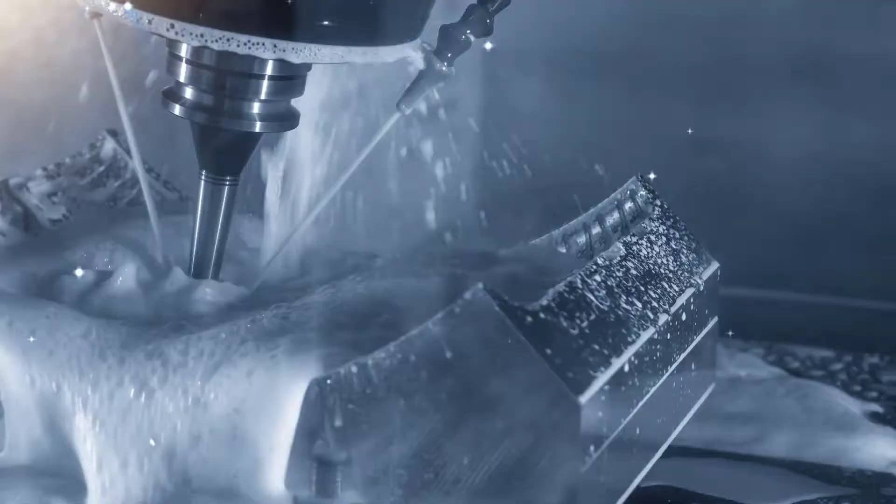Hello and welcome to this GibbsCAM Tech Tip on Transforming Toolpath.

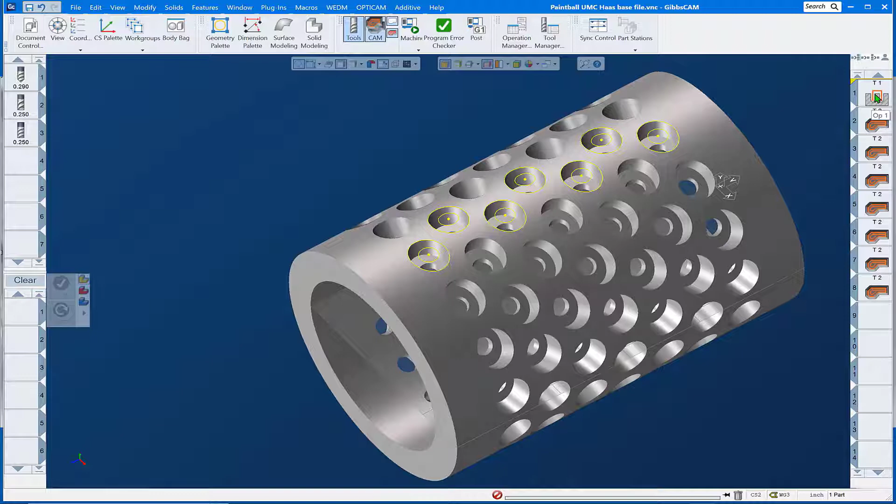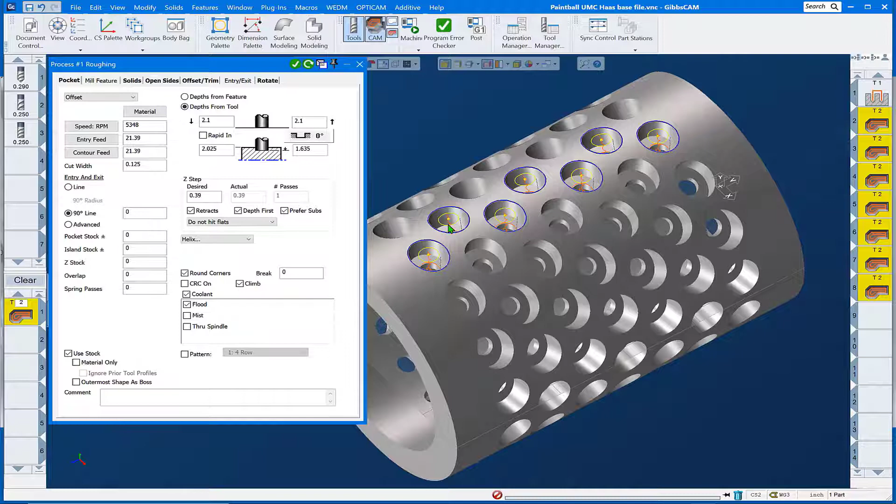We're looking at a rotary encapsulated die here that we need to do some repetitive toolpath on, and then rotate it around this part to complete the operations we need to perform. So looking at this, we have a simple drill routine running down this row of 4 and back up this row of 3. And we also have a roughing pocketing routine that's doing the same thing. Down the row of 4 and back up this row of 3. And there's actually 13 instances around the part.

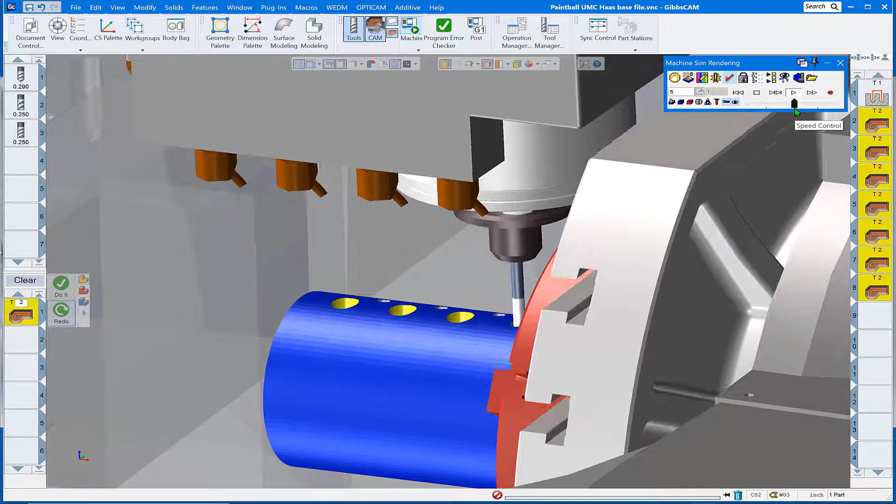So let's take a look and see what this looks like in cut part rendering. We got our Haas UMC 750 set up here. And we'll go ahead and do a render start. And we can see that it drills the 7 holes right in the manner we want. And now we're pocketing down a row, back a row, just what we need. Okay, well, let's get this populated around the whole part then.

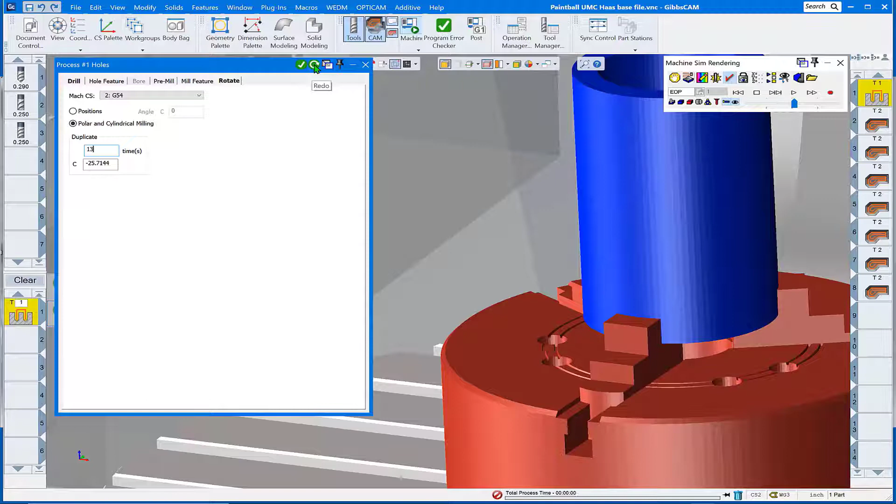First off, we'll do the drill routine. We're just going to come in here under the rotate tab, tell it we want 13 instances of that at this angular displacement, and give it the redo button. And it updates that process and operation over there on the right. And we'll do the same thing for the pocketing routine at 13 more instances at the same angular displacement. Say redo it. And the rendering updates.

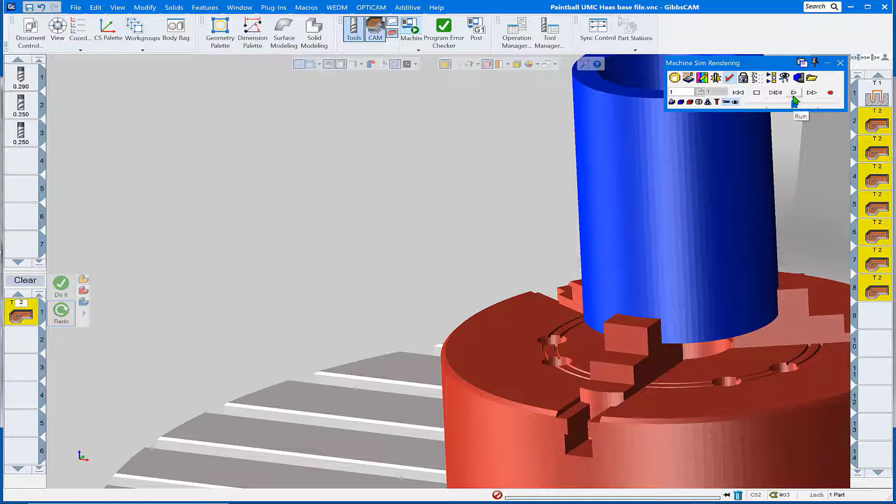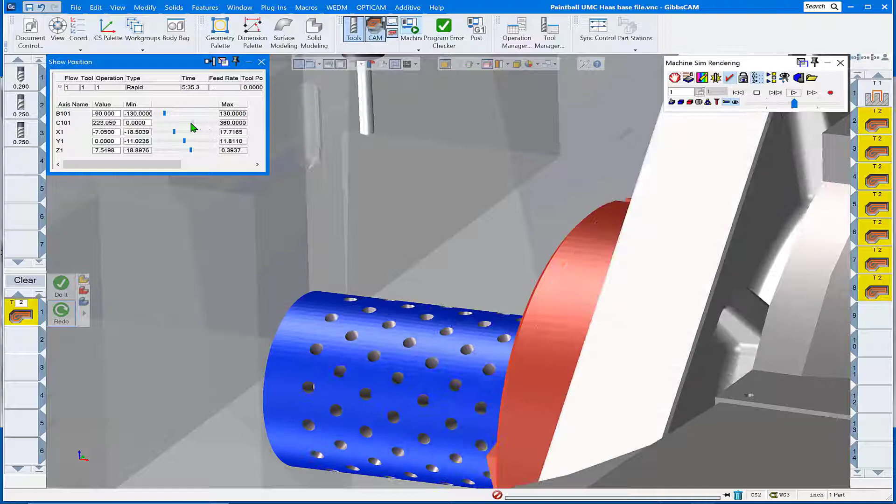And let's rerun the rendering. The play button here. And bada bang, it knocked out all the drill routines. Let's take a quick look at what we got here. We open show position, we can move the Z-axis head up out of the way and rotate the C-axis around to see what we have. And yes, we covered all the start holes we were supposed to on the die.

Let's go ahead now and run the pocket routine. Well, that is not quite what we were hoping for. What it's done is taken the operations over on the right hand side and done exactly what we asked it to and repeated it 13 times at that angular displacement around the part. That's not quite the toolpath we were hoping for. So let's undo that. Let's set this back to 0 and do a redo of that.

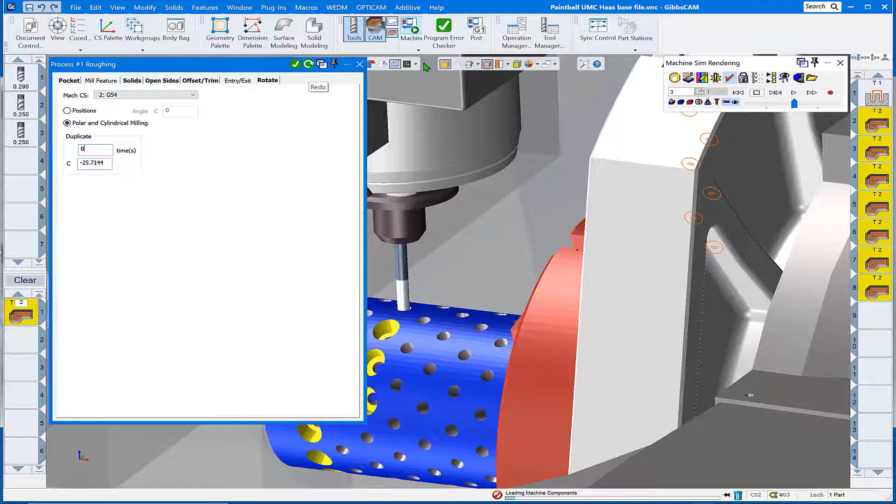It updated the rendering, and before we start the rendering, what we want to do is transform the toolpath. Tip of the day. We have these operations all highlighted, and we're going to transform that toolpath into Plug-ins, Toolpath, Transform Toolpath. The Transform Ops dialog comes up. We have the ability to translate either in HVD or in a rotary fashion, which we're going to do today, around an HV center at our angular displacement we wanted.

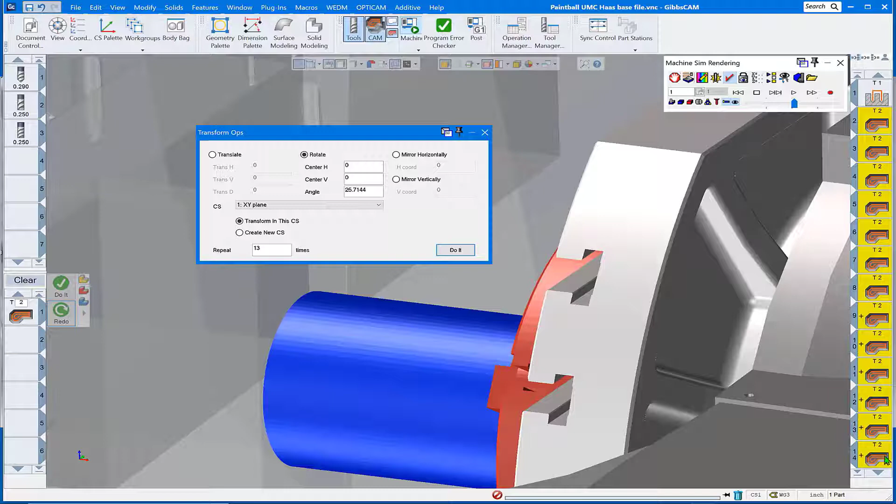From the XY plane, we're going to transform in this CS 13 times. We'll do the do it button. And sure enough, we had our additional transformed operations over here on the right. And let's run a render and see what we have.

Here we go with our pocketing, and there we go. Down the row of 4, back the row of 3, second instance down the row of 4, back the row of 3. So there you have it, Transform Toolpath, one of those easy, quick tools in GibbsCAM.